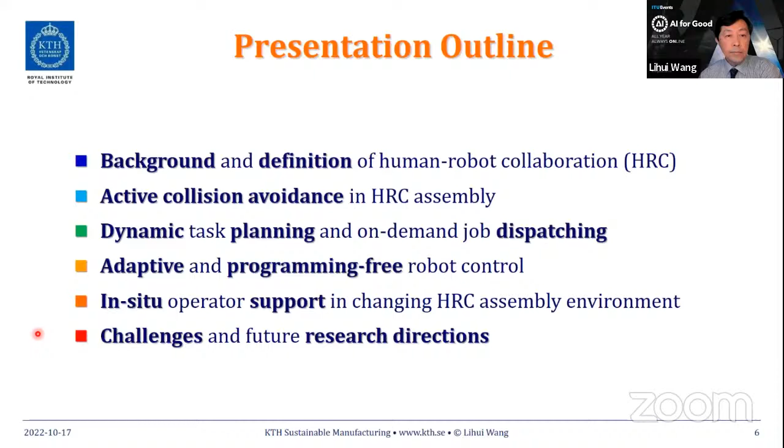First, the question we normally need to ask ourselves is why we need to have humans and robots working together. In the past, automation has been around for many decades. The aim is to pick up the work from human beings and do it in an effective way. Automation has its benefits, particularly from a productivity and efficiency perspective. However, it has a limitation.

If we look at the final assembly line of the automotive industry or the aerospace industry, much of the final product assembly is still based on manual work by human workers. The workload is high, and repetitive work is not good for the health of human operators. This is the need for introducing the robot to help humans.

From this survey of 482 SMEs, small and medium-sized enterprises, in the responses we received, the top one is a robot with an integrated collision avoidance system. Safety is most important. Second on top is a robot with programming for everyone.

User-friendliness is mentioned here. And the third one on top of the wishes is a desktop plug and produce robot, also related to the user-friendliness. There's another one: SME companies want to use the robot as the operator's third hand. So this is another one. The color bar shows here, the color code represents different manufacturing sectors as illustrated here.

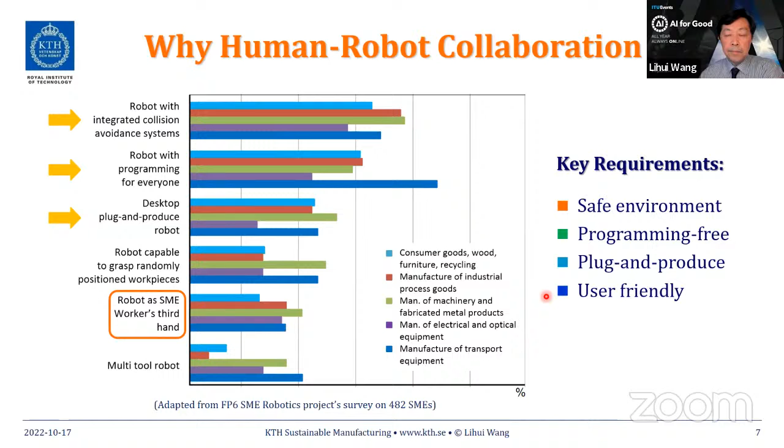From industry requirements, we can easily find the research requirements here as well. In the future, the key requirement is to make a production environment safe. The second one is programming-free for the operators. And the third one, plug and produce. Fourth one, user friendly. This has formulated the scope of today's talk. So I will go through the literature review in 4 different core areas.

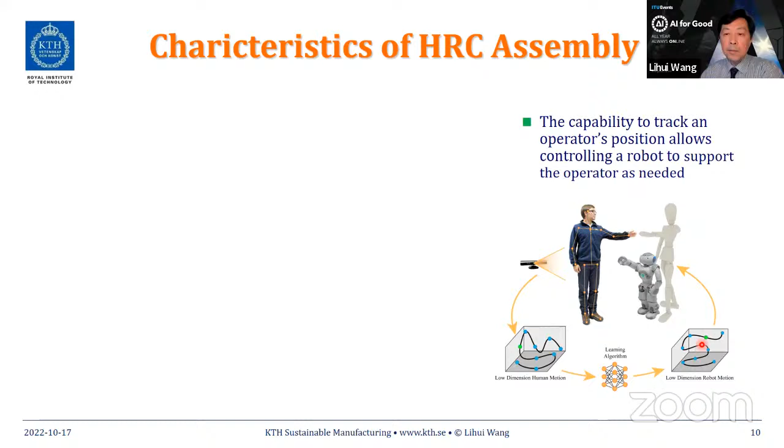Then we need to understand the characteristics of HRC, especially in assembly. As I mentioned earlier, the robot in this context is not to replace a human, but to assist human operators. The robot initially may not have the needed skill set. So over time, the robot can learn from the experience of the operator. In this case, we can apply AI algorithms, receive information using sensors from human operators, and after learning retrieve the data and convert it to knowledge. And that knowledge will help the robot do the job better and better over time. This is a learning process.

When human and robot work together, it is in a dynamic environment. In this dynamic environment, we cannot use pre-generated code to control the robot, otherwise everything is predefined. In a dynamic environment, the robot needs to respond to the human's requirements, the situation, the context. From another perspective, humans need to control and communicate with the robot in different modalities. Naturally, we think we can talk to the robot just like we talk to another teammate, or use hand sign language, or whole body sign language to communicate with the robot. Those signs need to be predefined, understandable by the system.

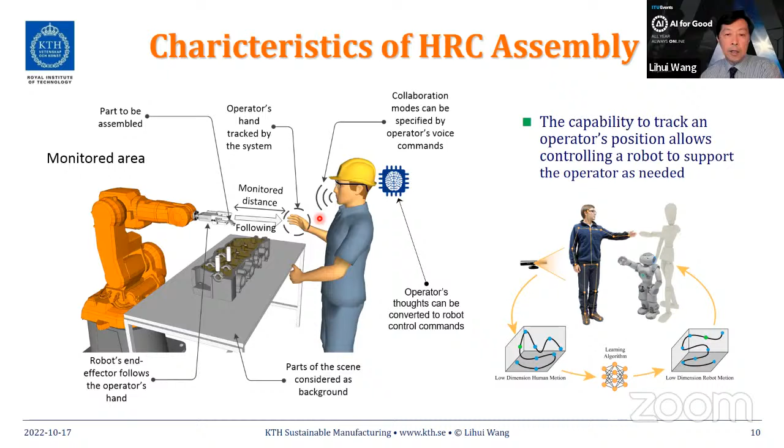And how to process the sign language and speech also relies on certain AI algorithms in order to improve the reliability. Haptic control is another way, but it is also possible to use brainwaves to control the robot. When we use speech to talk to a robot or use gestures to communicate with the robot, all those actions are controlled by the human brain. If a brainwave can be retrieved, especially the embedded command, then we can pass the command directly to the robot. This has some benefit, especially in a noisy environment where speech may not be reliable, or when the human operator is busy doing assembly tasks and there's no free hand to make gestures. Then we can use brainwaves. Or sometimes we can combine two or more modalities together to increase the reliability of the communication. The next aspect is the key properties of our human-robot collaborative assembly.

Multiplicity is one of them. Human and a robot can work in one-to-one relationship, or many-to-many, or team-to-team. A team shares a common objective when working with another team of robots, while in many-to-many, each may have their own objective or goal. That's the difference.

Collaboration also depends on who initiated it. It could be robot active, human active, or supportive and intuitive. There are different ways during collaboration: when both human and robot are active, they're engaged in the assembly task trying to complete the work at the same time. Or the robot can be active while the human provides supervision and correction when needed, and vice versa. Human can be mainly the assembly worker while the robot provides screwdrivers when needed, just like a nurse in a surgeon's operation room.

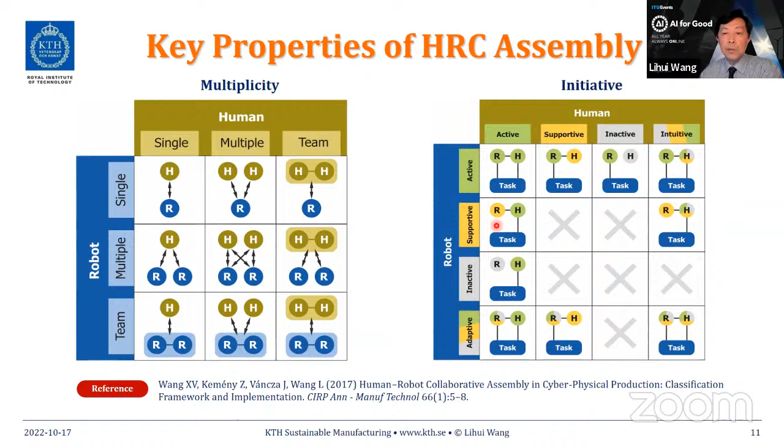Now we can have this definition. What is symbiotic HRC? What are symbiotic HRC systems? A system in this case needs to have the capability of self-learning. This self-learning especially applies to the robotic system, not the human operator. The human operator, as a natural human, will have self-learning capability already developed over time, but the system needs to have this capability empowered by AI. It also needs real-time multimodal communication capability to understand the context.

From recent history, we know several quite amazing achievements in the AI field. When AI is applied to Go game playing, AlphaGo stands out. AlphaGo competed with Go game champion Lee Sedol of South Korea in 2016, and AlphaGo was created by DeepMind.

This is a cloud computing issue. There are a number of different cloud servers located in the US. It is also a big data issue. In order to win the game, there are 30 million different moves. The computer or AI algorithm can find the most appropriate steps every time that has the highest probability to win the game. However, for a human being, searching through this huge solution space within seconds or a few minutes is impossible.

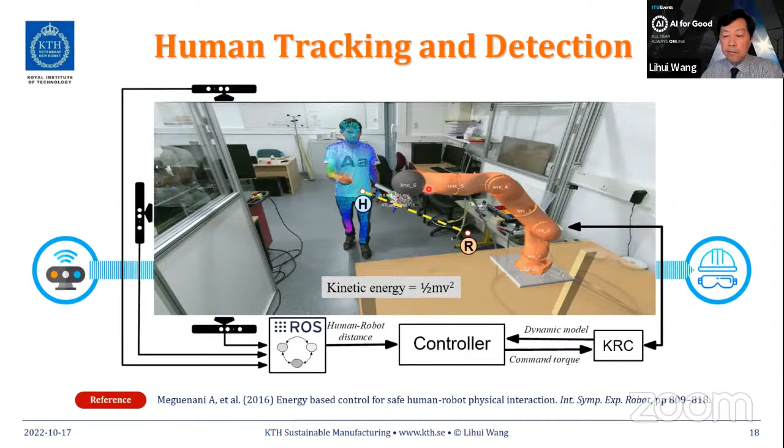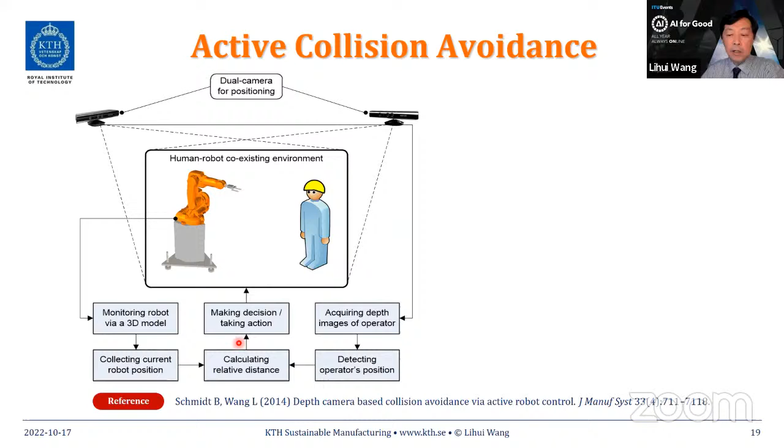A similar approach was reported 2 years earlier by my research group. In this case, we retrieve the movement and behavior of a robot using sensors, monitoring the robot through a 3D model, and putting cameras around to monitor the robot and human. The point cloud of a human being can be retrieved, and this 3D point cloud is superimposed onto the 3D environment. Then we can calculate the relative distance, which is used to control the behavior of the robot. The processing is shown on the right-hand side.

Here you can see a recorded demo. Without touching the robot, it will react and try to avoid a collision.

On the right-hand side, you can see the colorful images on top—that's from 2 cameras with depth information. The red is closer to the camera, the blue is further away. After removing the background information, we retrieve the humans from 2 cameras and integrate them together to get a 3D point cloud. This is superimposed into one digital environment to do the calculation and control the robot.

In order for the assembly line or assembly cell to work properly, we also need to specify different safety policies.

When a human approaches the robot and reaches a certain threshold value, an audio warning will be triggered. At the same time, the robot can reduce its speed to prepare for a sudden stop.

The second safety policy is: if this distance gets even shorter, the robot will stop.

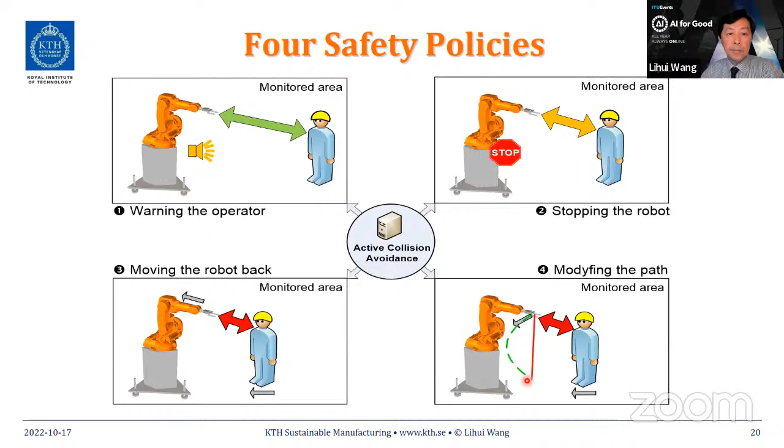If this safety policy is combined with the assembly plan, the robot will have a different behavior when doing different assembly tasks. So here are some examples of testing.

The second research topic is how to decide the assembly plan over time. There may be different scenarios to consider along an assembly line. In the first case, robot and human work on different sides of a car—there's no direct contact, no risk to the human being.

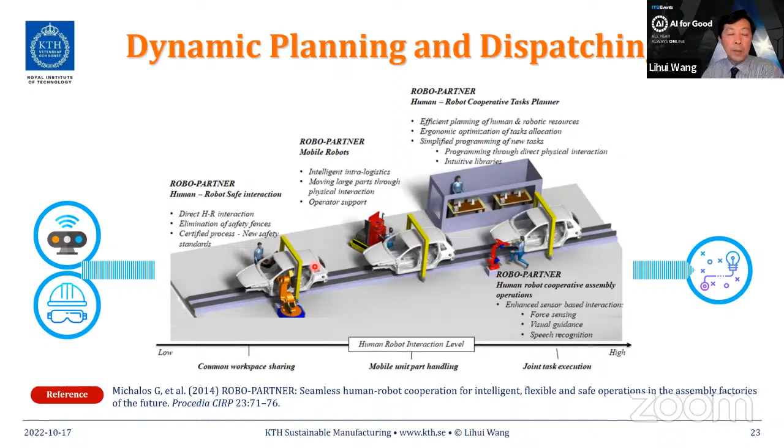Machine learning can be applied to solve these problems and find solutions. There's a number of different data sources already available—retrieved by sensors, robot controllers, smart tools, or even historical databases.

The data at this stage remains just data, but after the learning module, the data can be converted to knowledge. This knowledge, once applied to domain-specific modules, will be converted into proper actions for the robot to take to help human assembly.

Domain-specific modules include how to recognize the assembly parts that a human is holding, what the human is doing right now—human activity recognition—and what the trajectory of the human's movement will be in the next few seconds. All those are relevant questions that machine learning and deep learning can help with.

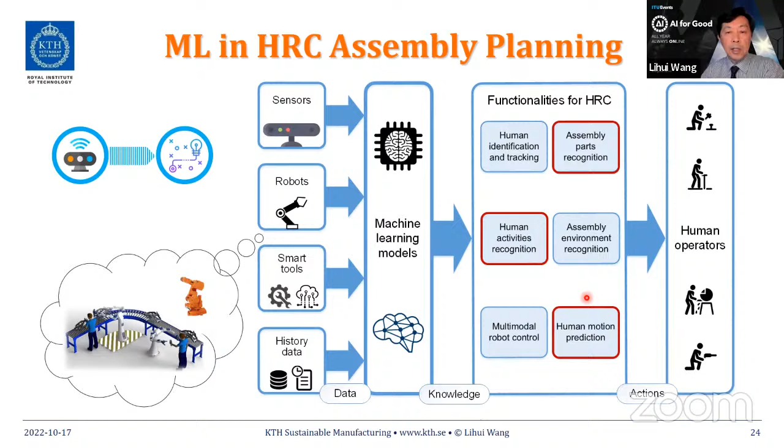This slide shows some results after training, showing how captured video images can be analyzed properly to identify what part or tool the human operator is holding, what assembly action the human is doing—installing, picking up a component, or just standing. Here is the result, calculated in real time with high accuracy.

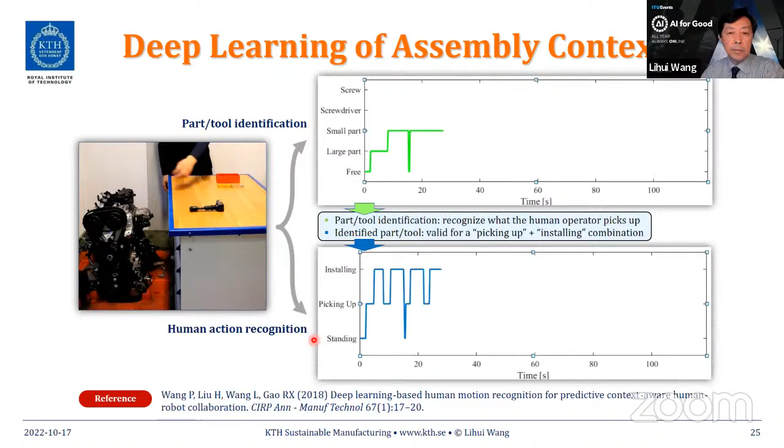This is one example of how deep learning is applied.

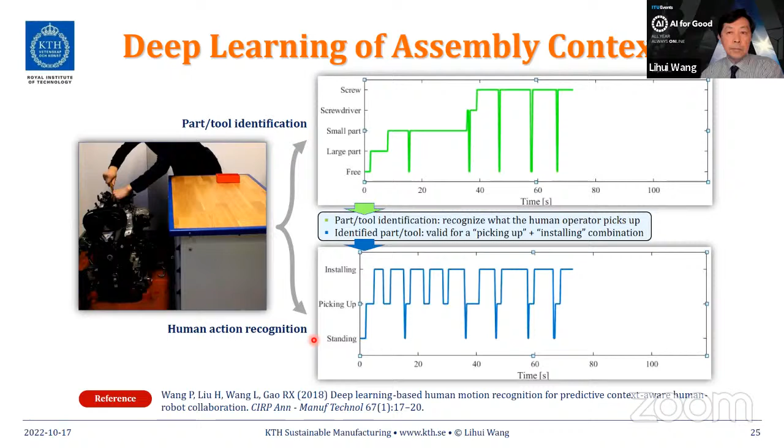Moving forward, if we have a camera that can see the real situation, the video images are passed to an image processing module to recognize human motion, parts, tools, and context awareness. This will further help the robot make decisions about when and what tool needs to be passed to whom.

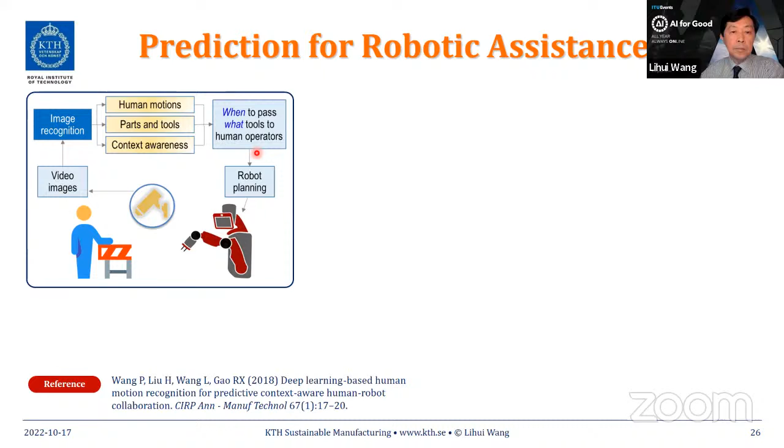Behind this, we can use different machine learning algorithms or probability analysis. The actions and components can be symbolized by different symbols, and there's a logic behind them. We check this probability from low order to high order, eventually to maximize the logic—that gives you a different pairing in sequence.

When I pick up a screw, the robot will hand over the right screwdriver, either plus or minus. All those details can be done and retrieved from learning modules—that's the objective.

Another way to get context-aware trajectory planning is through learning from training. Initially, if I reach out my arm with a handband on it, the trajectory can be captured through a camera or embedded sensor. Every time I reach out, there's a trajectory, and this can be done multiple times to capture all possible trajectories of a human in this case.

We can teach the robot by dragging the end effector of a robot to the human hand for safely handing over the component. Every time you drag it over, that's the trajectory of the robot. This can also be done multiple times to get sufficient data. This is passed to the module to normalize both the human and robot trajectory, then we can create a correlated model.

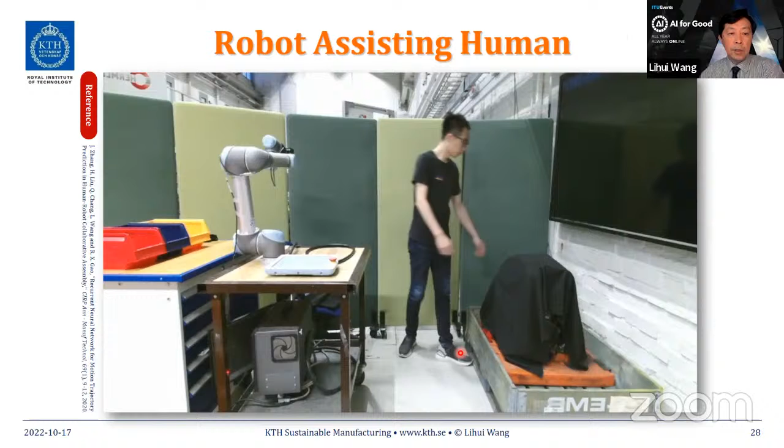In reality, during real-time inference, whenever a human reaches out, there's a trajectory that can be captured. From the correlated model, it is possible to identify the most appropriate robot trajectory. After normalization, we have a real trajectory of a robot that can guarantee the component can be handed over to the human. So here's one recorded demo.

You will observe that every time a human hand is at a different position, different height, the robot can pass it over. Behind this, we use a recurrent neural network to do the calculation.

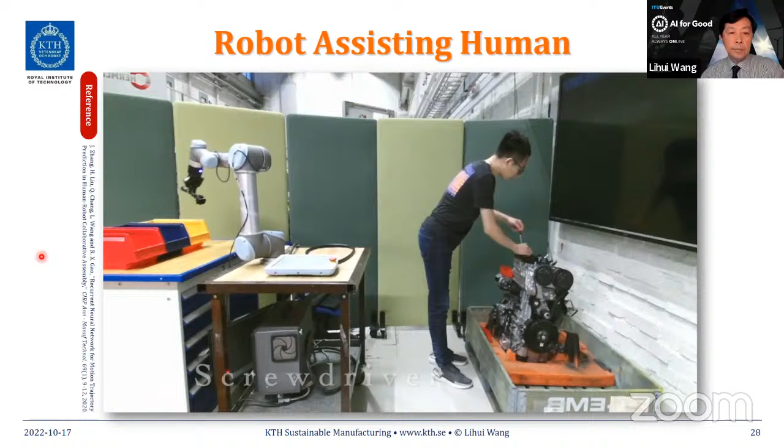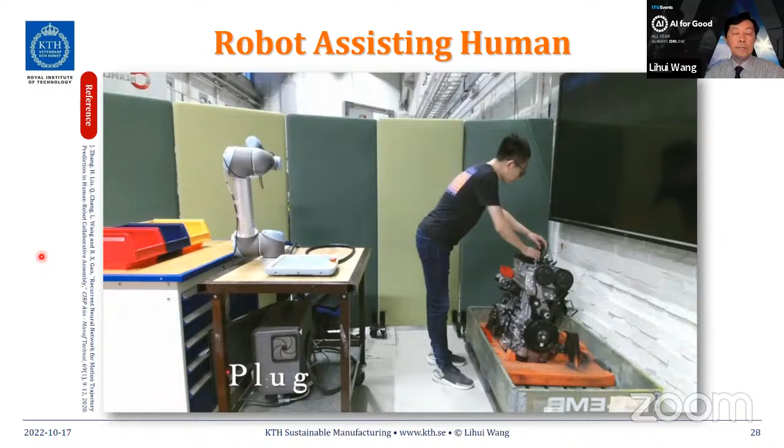So the next research question needed to be addressed is multi-modal communication between human and the robot. There are different ways to realize this programming-free objective: a gesture-based approach, a brainwave-driven approach, a haptic-based approach, or a voice processing-based approach. Given the time limit, I will mostly focus on the top two.

Regarding gestures, there are different types. Either it's an intended gesture or unintended gesture. For unintended gestures, we do not consider here. For intended gestures, it can be divided into communicative and manipulative. Manipulative is very straightforward for human beings - whether it's pushing or turning, by the action we understand the meaning. This can be captured and communicated to the robot.

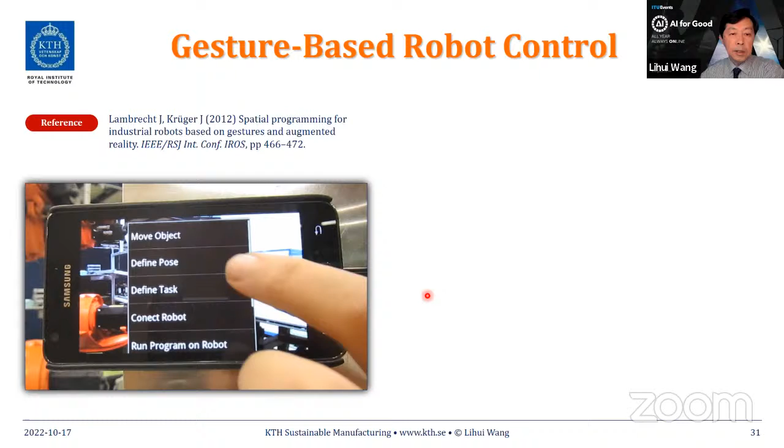So here's one example: use pointing gestures to specify points in 3D space by connecting the points together - that's the robot trajectory. Using augmented reality, we can visualize those pointing trajectories and how the robot follows them. It is also possible to use finger gestures to grab and drag the waypoint in 3D space to modify the trajectory in real time.

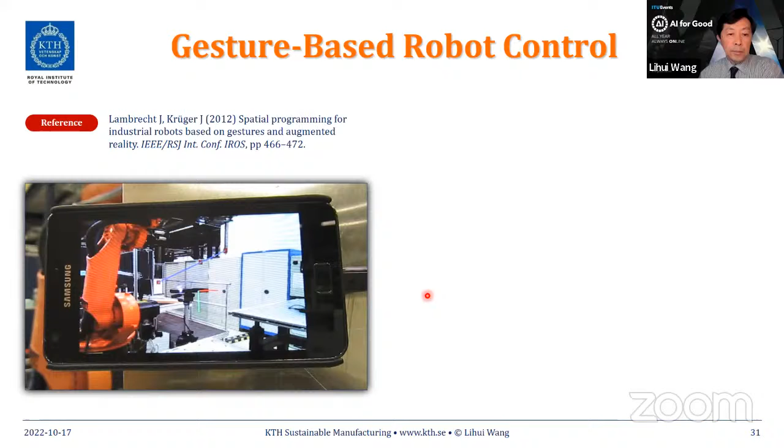Without programming, the robot can follow this new trajectory in 3D space. You may observe right now the accuracy is not high, and this is some future work - related to how to process the 3D gestures to increase the accuracy of the algorithm. There's some work to be done in the future.

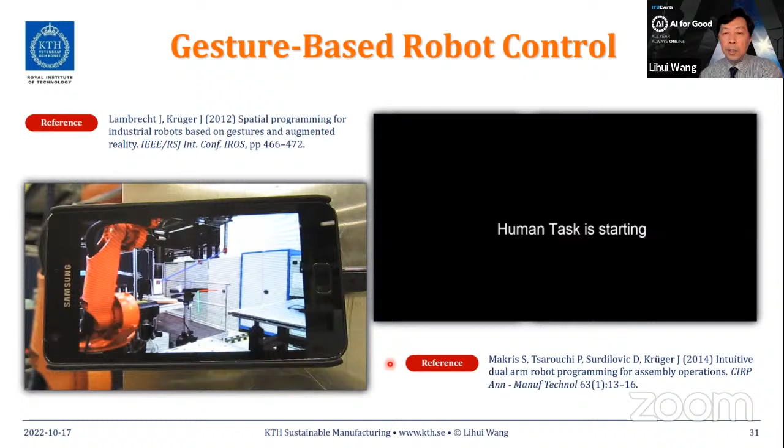We can also apply whole body gestures. In this case, because the robot is heavy, big, and risky, we ask the robot to stop by this gesture. Then the human operator can safely do her job to mount a cable. Once this is done, she uses a different whole body trajectory gesture to tell the robot, now it's your turn. The robot will pick up the task from there and continue. This is another way of interacting with the robot.

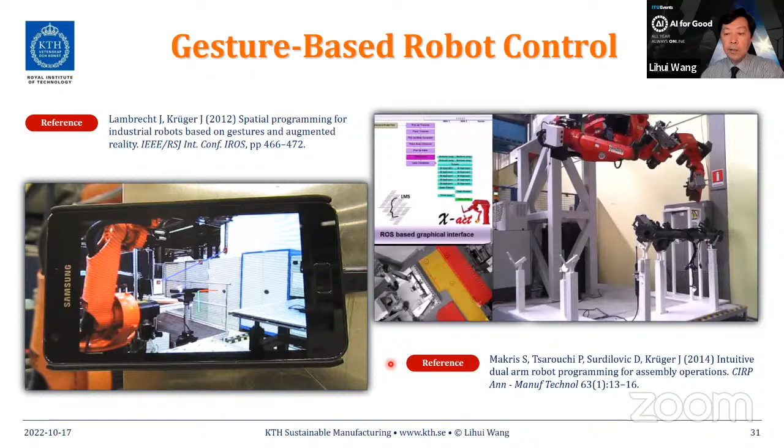Using brainwaves to control a robot is another modality, but it's also very challenging. When we silently think about a control command, our thinking can be captured by EEG signal - that's a brainwave - through multiple channels through electrodes. The EEG signal, electroencephalography, can be passed on through the processing pipeline.

Amplify the signal to make it stronger, retrieve it, remove the noise or artifact, extract the features embedded in the multi-channel brainwaves, classify them, and eventually convert them to a function block. The function block with internal algorithm can further generate trajectory control commands for the robot to move. So this is how brainwave can be converted to robot actions.

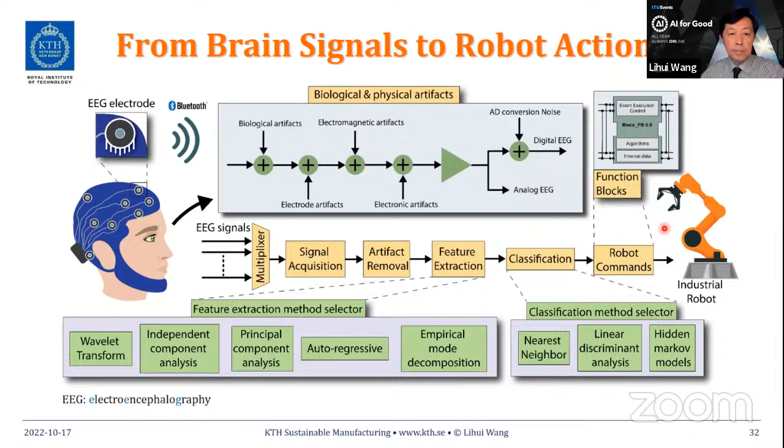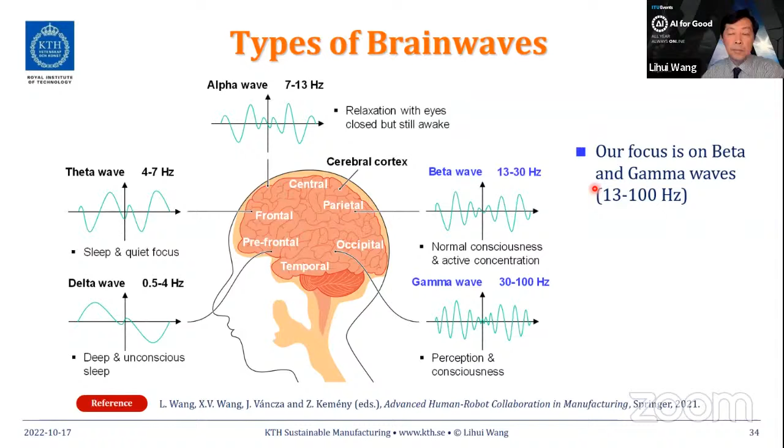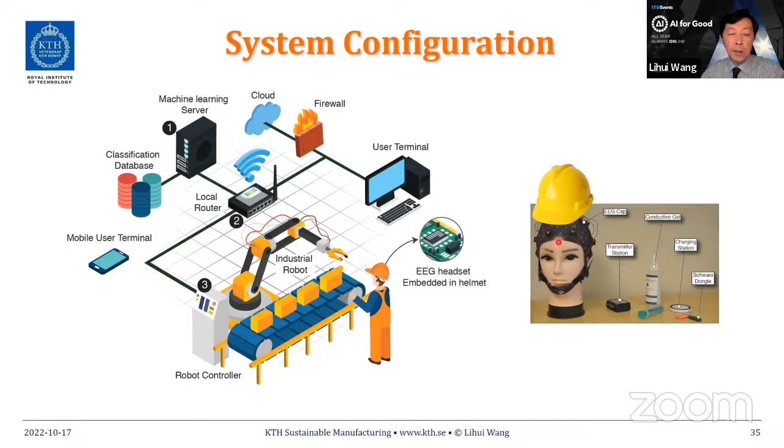We can think about once there's an alert or emergency panic situation, the panic will generate a high-frequency brainwave, and that brainwave, if picked up properly, will trigger an emergency stop of the nearest robot for safety protection. This, of course, needs to go through the pipeline of information processing, signal processing. I will not provide the details about this. However, if you are interested, there's a reference listed here for you to go through later.

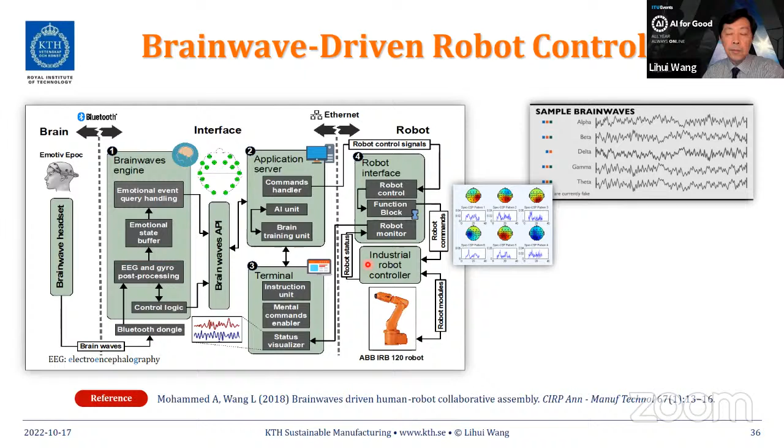The pipeline is to analyze the brainwave, retrieve the hidden pattern inside from multiple channels, and then pass it on to a function block to generate a control code. We call this also macro-micro control strategy. The brainwave signals or the brain-human control command is used to trigger the right function blocks, and the function block will tell the robot how to do the job.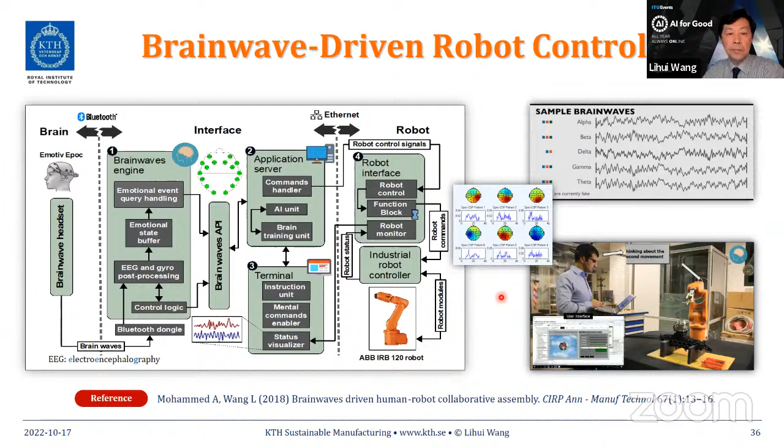If we want to visualize them, this is a topography map of a human on top view. Here's a nose, here's an ear, and the dots are the sensor electrode placements. At different locations of the brain, the strength of the signals are different over time. And the waveforms from different channels are also illustrated to the right and the left.

The macro-micro robot control strategy works like this. Because we cannot tell the robot to move from left to right only by 10 centimeters or move at a certain speed. This very specific command is difficult to process. However, we can use the high-level command to trigger and select the right function block. For example, insert a pin. Then it will trigger the right function block. How to insert a pin is up to the function block to decide.

It has several embedded algorithms inside to decide the position, trajectory, speed, acceleration, force, and so on in order to push the pin in. The behavior of the function block is governed by an internal execution control chart or finite state machine to call the right algorithm. Eventually, as I mentioned earlier, the high-level control command will trigger the right function block chain in order to do the task, to safely do the assembly without collision.

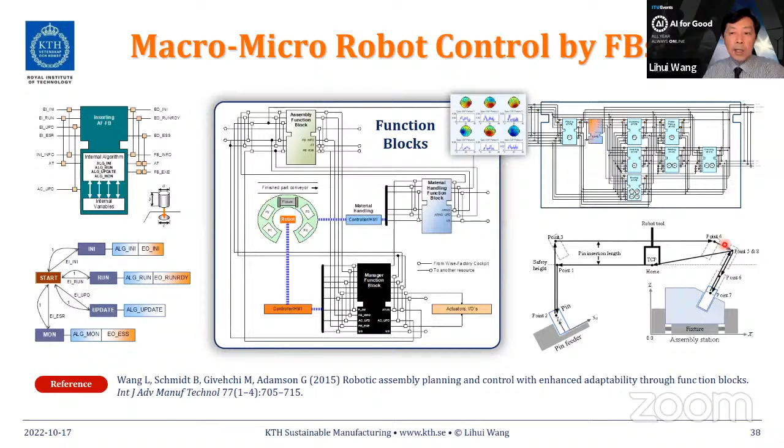The last research topic I wanted to share with you is how to support operators. Normally, from a plan, we know what to do, but here we also need to figure out how to do it. How to do it can be visualized to support a human operator, either using virtual reality, VR, or augmented reality, AR, or using audio, video, or text. Different types of information can provide hint support to the human operators.

In a central system, the planning and replanning is conducted. The result is sent either to the human or to the robot to execute the task. At a certain time, feedback will be provided from both the robot and human. And here, the operator uses AR devices like a HoloLens to support and visualize the needed information. Normally, VR is used for ergonomic design to decide the best gestures and positions that a human needs to do the job.

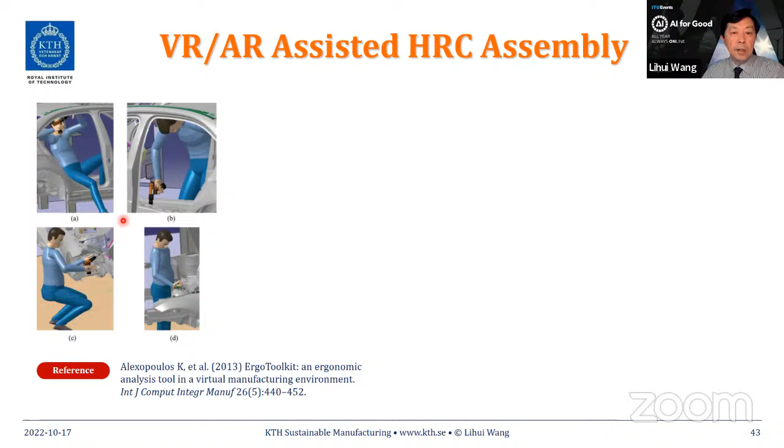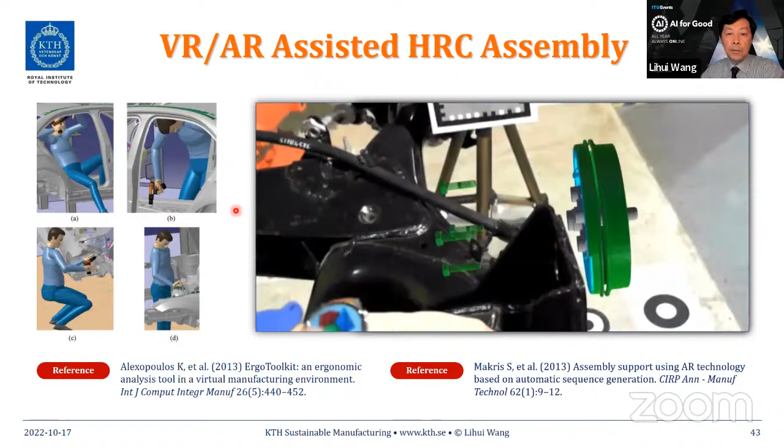Augmented reality can be used for real assembly operations. We can rely on a smartwatch to initiate this interaction with the augmented reality. Then on demand, we know right now we need to assemble this component and fasten 4 screws. That's one way to help the human operator. It is also possible to visualize the trajectory of a robot as shown in the blue line. Then the operator knows where to stand in order to avoid a collision.

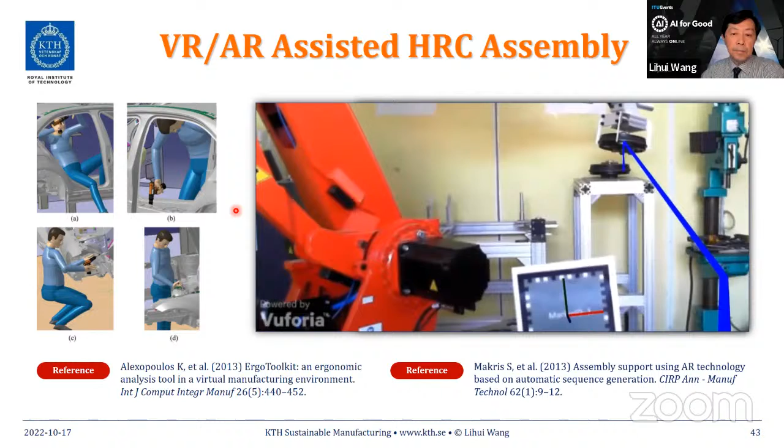Safety mostly is related to standards. There are a number of different standards, either European standards or international standards specified by ISO, already established. However, these standards are mainly for the robot, safety of a robot, and the human normally is outside of the fence for safety reasons, according to these standards. There is one standard under development. This is still a technical specification for human-robot collaboration. Until this is done, practicing human-robot collaborative assembly is not legally enforced in practical industry situations.

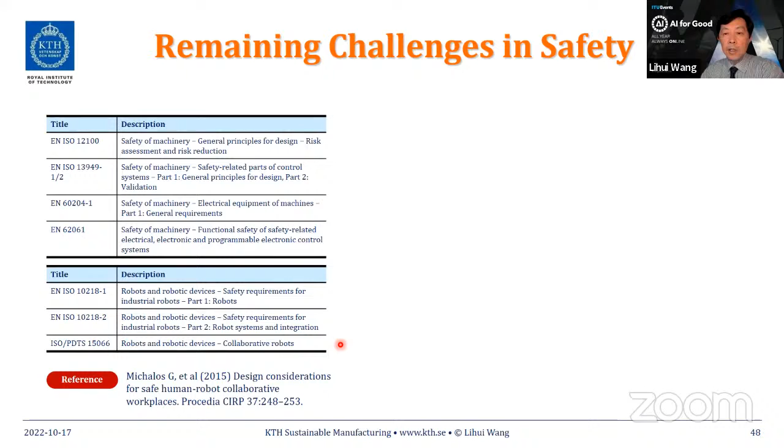Even so, there's a lot of challenges. This brain robotics does provide some opportunities. Through this brain and robot interaction, it is possible to monitor and control the robot through brainwaves. It is also possible to sense the engagement of a human being in task doing. If a human is tired, perhaps it is good to slow down the pace of robot assembly, or even give an operator a short break, or in a panic situation to trigger the emergency stop.

However, the challenges, as mentioned here, are the accuracy, stability, and fine-grained control command. This is difficult for brain robotics. The brainwave is so complex. Even when we blink our eyes, it generates interference with the brainwave. Everything is controlled by the brain. If we wanted to control a robot, sometimes it may not be feasible if we're doing some other tasks simultaneously. How to separate the true control command from messy brainwaves is a challenge in signal processing.

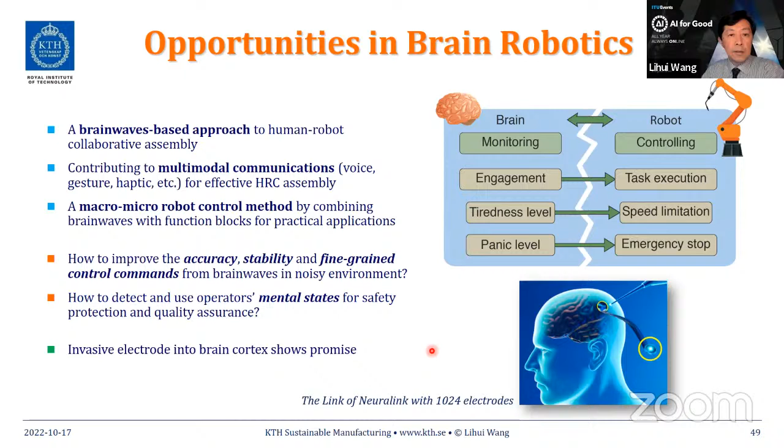There are several future research directions. Standards are one of them. How we can contribute to standard development to make them realistic is a challenge. If the standard considers the worst scenario, the speed and force limitations will make the robot not cooperative to humans, or not productive, not efficient.

Another one: how about if we apply digital twins to human-robot collaboration and let the digital twin execute in advance to explore different scenarios, including safety issues. Then when human and robot work together, it's always practical, safe, and feasible. Sometimes emergency does happen. When emergency happens, how to bring it back to normal operation, this mitigation plan is important.

When we use AR glasses or goggles, over time, it generates mental stress. We feel headache, dizzy. How to develop mental stress-free devices is another challenge, or use a different way to display augmented reality instead of goggles. Trust: how to build trust between human and robot. Because there's no absolutely safe system, we do not trust the program, we do not trust the system, do not trust the robot, just in case.

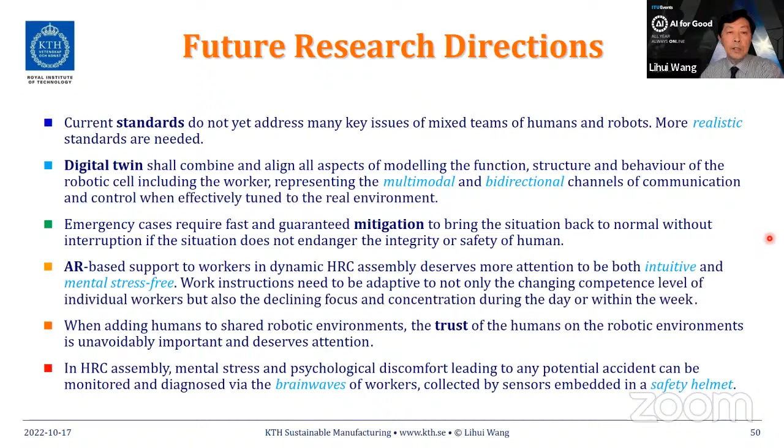If we can properly analyze the brainwaves, we have another layer of protection. When we are scared, we generate panic signals in our brainwaves. That could be a last resort to immediately shut down the robot or a machine for safety protection purposes. Now I would like to show you an all-in-one video to highlight how these different technologies, AI, can be combined together in a workable scenario.

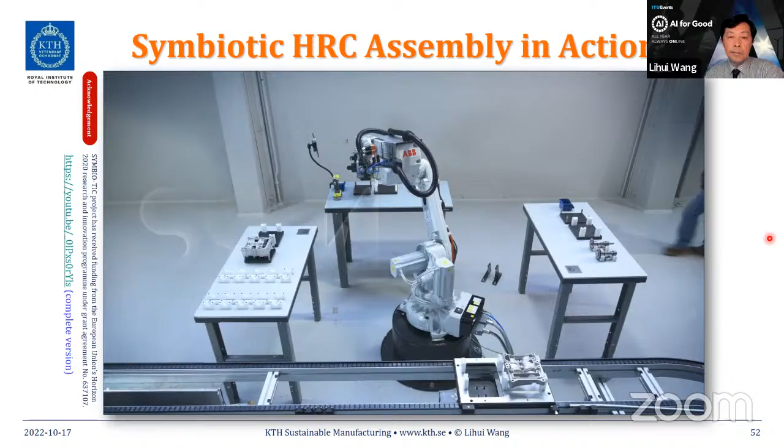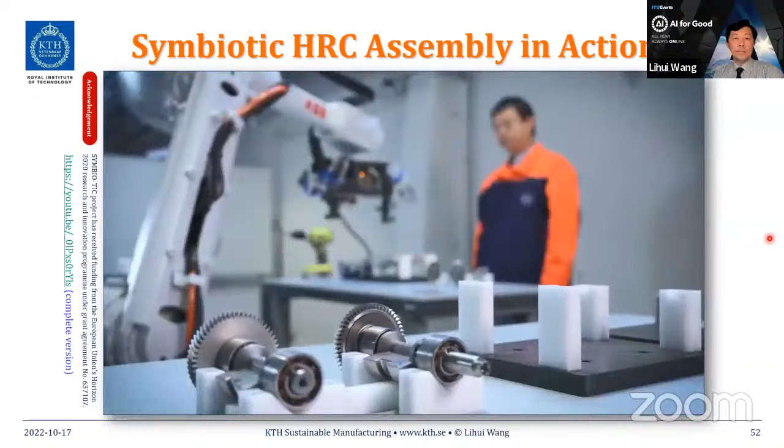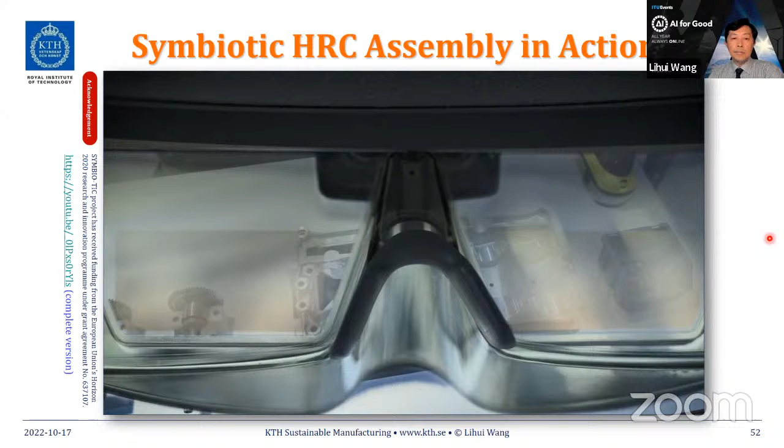To enhance the scope of robot applications in all industries, we need a new generation of intelligent robot systems that offer a truly symbiotic collaboration between human workers and robots. A system that not just guarantees the safety of human workers in a fenceless, dynamic and intuitive working environment, but also supports the worker by offering instructions and help according to the workflow. A truly collaborative robot system must also offer easy and intuitive tools for system interaction and robot control. Symbiotic, show me the part.

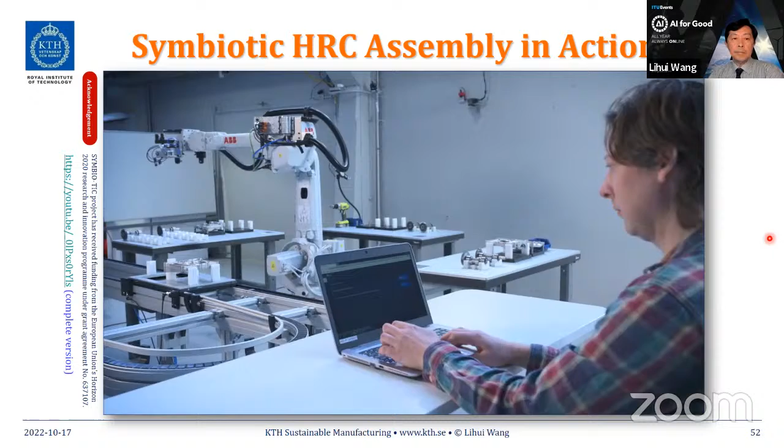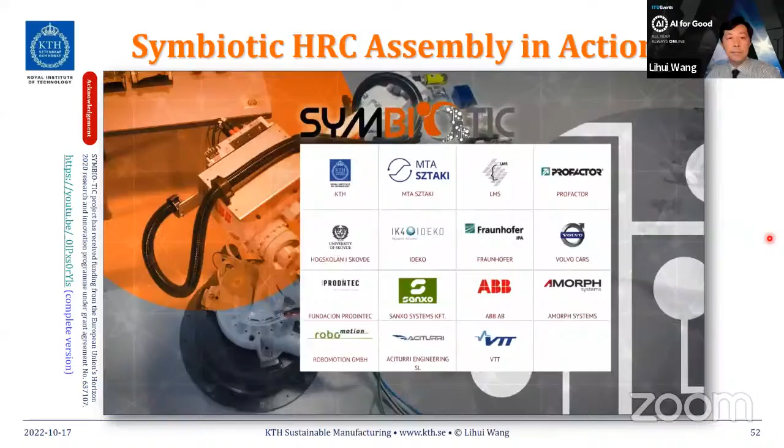Besides the collaborative aspects, a symbiotic robot system also needs simplified methods of robot programming, so that even non-expert users can easily create new program sequences or complex task planning, even for small lot sizes. Therefore, 15 research centers, universities and companies from all over Europe have joined forces in the Symbiotic Consortium to develop new solutions for a safe, robust and reliable human-robot collaboration.

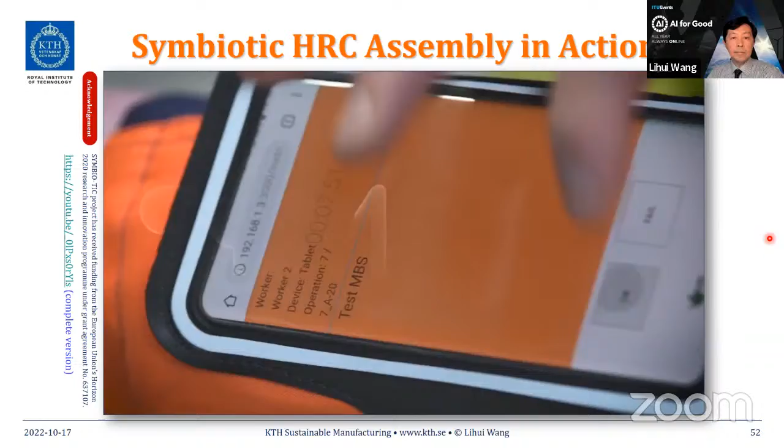The last piece of information is more for the future. We are in a period of considering Industry 5.0. In Industry 5.0, human centricity is highlighted as one of the pillars. We consider the future assembly could be human-centric in order to maintain the leadership position of a human being. But a human has some limitations in terms of physical strength. In this case, if we apply an augmented robot like an exoskeleton, it can energize the muscle power of a human being.

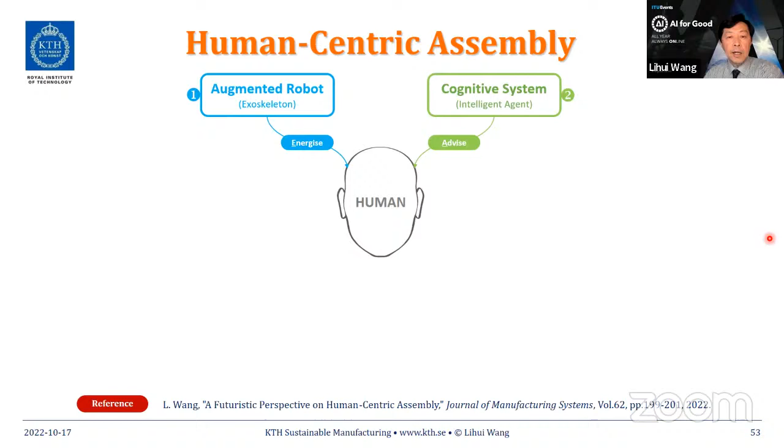We can also apply cognitive systems to help the human operator, advising the human operator of the holistic situation to make a better decision. Sometimes our observation, our perception, is based on direct sense. However, sometimes we cannot see something important. If we use augmented reality, we can see something that is non-visible. Using a digital twin, we can predict and observe what would happen in the near future.

Our brain has a limitation in terms of computation power compared with other types of computers, and intelligence also has a limitation. However, we have flexibility, we have adaptability. Combining artificial intelligence with human intelligence to have this co-intelligence is another way to make right decisions at the right time. Then we can use our thoughts to control the robot, to have free hands to do the assembly by ourselves in a team.

In this case, the robot can provide the needed support based on the real-time feedback from the assembly situation. This human is empowered, and all the supporting technology is to ease the human task. Then this individual may need to work with other members to form a team. How to maximize the teamwork in a smart factory to make it sustainable and resilient is the aim for future research along this direction.

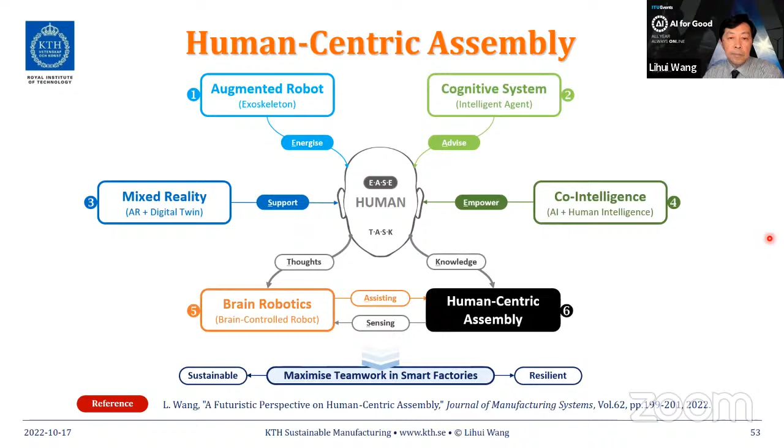To summarize, I talked today about how to guarantee the human environment is safe. Active collision avoidance is an active research area. Adaptive planning, job dispatching, programming-free robot control, and in-situ support to the human operators, supported by a central smart sensor network. Those are the relevant research topics for today and even for the future.